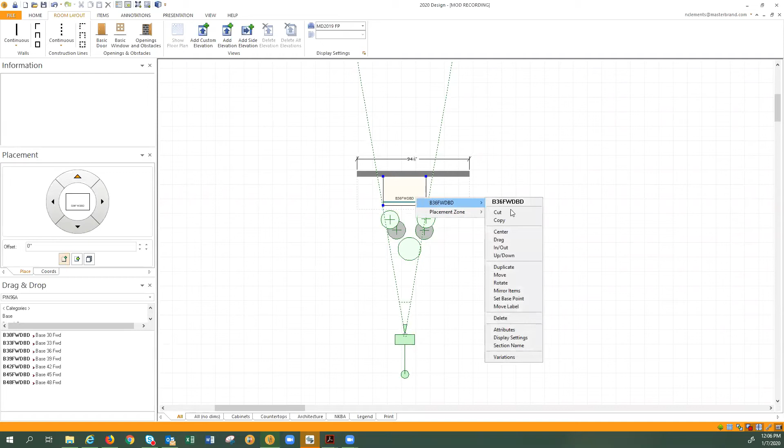In your most recent catalog, go ahead and drop in your base cabinet. For a wide stile, go to the attributes of that cabinet, then add-ons, base modifications, and frame modifications. Down the list you'll see wide stile. Go ahead and click on that, whether you want a left or a right. You'll have to do them one at a time.

A window pops up asking for the reveal, because they want you to specify the width of the reveal from the edge of your door to the edge of your cabinet. For this purpose, I'm going to say I want 4 inches. So we'll hit apply and OK.

That will go ahead and apply the wide stile. I'll show you here: the wide stile does not go down to the floor, it stops at the toe kick. If you want it to go all the way down to the floor, that is when you will use the wide stile prep for Pilaster.

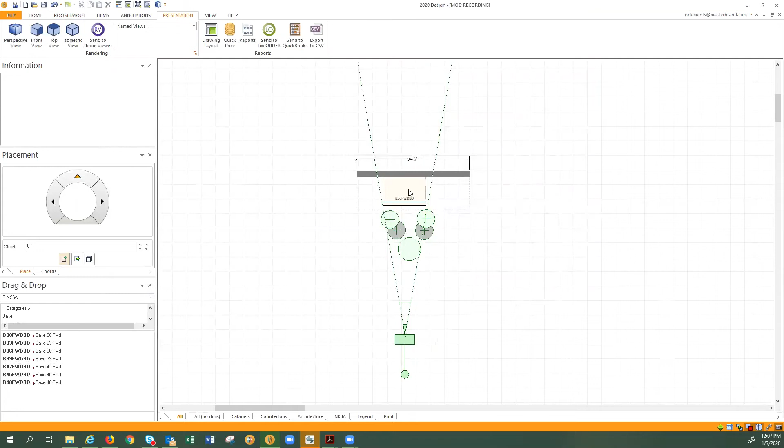So I will show you that one. Again, you'll go into attributes, add-ons, base modifications, and frame modifications. You'll notice here you have to read the nomenclature - it's got a P in it for Pilaster, so wide stile prep for Pilaster. Let's go ahead and click on that.

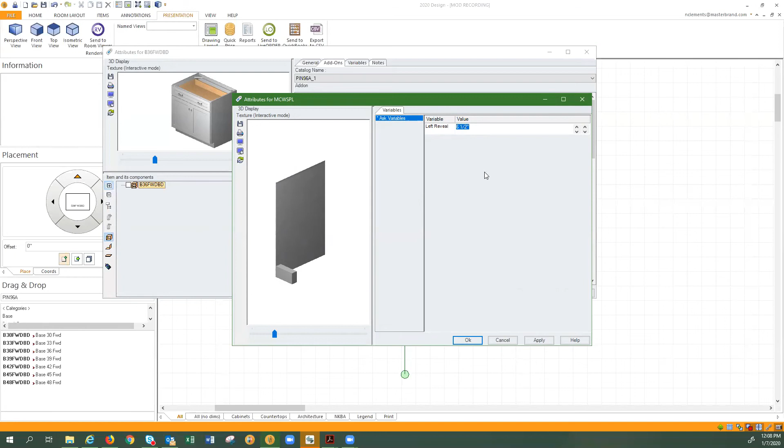The window will pop up again asking what's the reveal from the edge of your door to the edge of the cabinet. Let's say we want this to look like a leg, so I'm going to say I want this to be 1.5 inches reveal. Basically what I'm telling them is I want that left stile to go all the way to the floor, and then it'll kind of look like a leg.

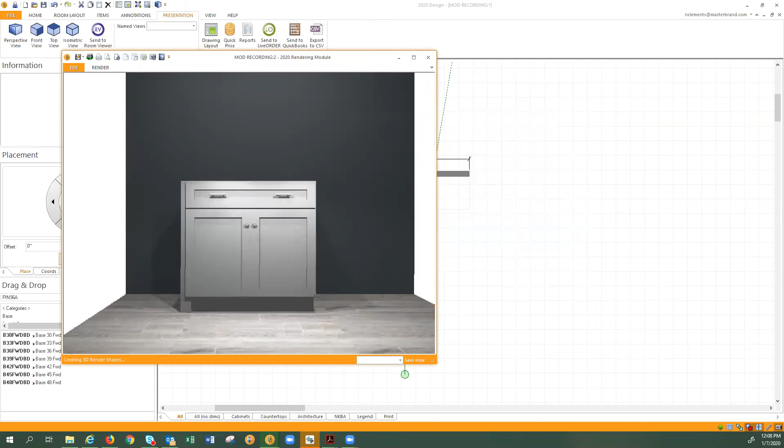I'll show you, because the prep for Pilaster will extend all the way down to the floor and it will receive a flush inside toe space. So by calling out 1.5 inches, I'm basically telling them I want that stile to go all the way down, and then it kind of makes it look like a leg.